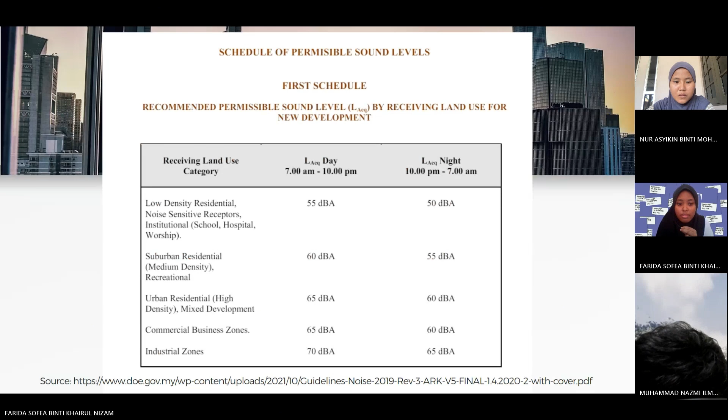We will continue our presentation with causes and effects of noise pollution.

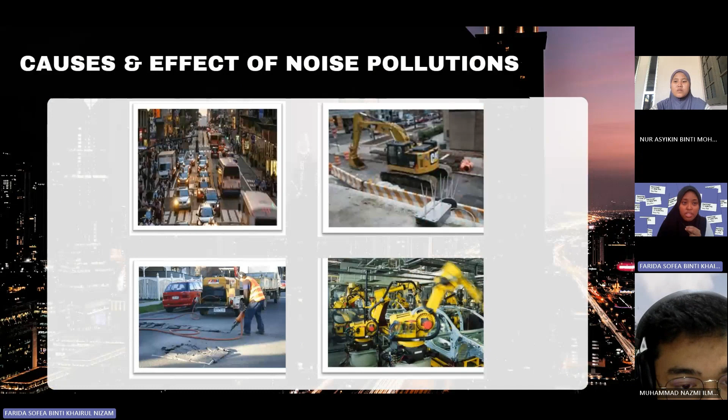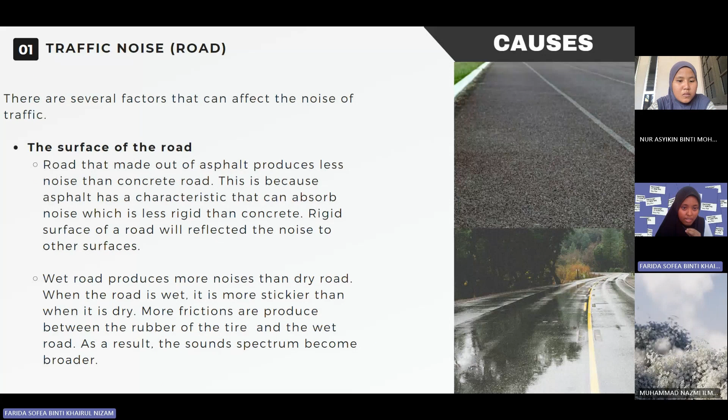The first cause of noise pollution is traffic noise on the road. There are several factors that can affect traffic noise. The first is the surface of the road. Roads made of asphalt produce less noise than concrete roads. This is because asphalt has a characteristic that allows it to absorb noise, as it is less rigid than concrete. A rigid road surface will reflect the noise to other surfaces.

Wet roads produce more noise than dry roads. When the road is wet, it becomes stickier than when dry. More friction is produced between the rubber of the tire and the wet road, and as a result, the sound spectrum becomes broader.

Second is the speed of vehicles. The higher the speed of the vehicle, the more noise will be produced. Vehicles driving at higher speed cause the engines to produce more noise, especially with an old engine. Besides that, higher speed vehicles have more contact with the road surface, causing noise to increase.

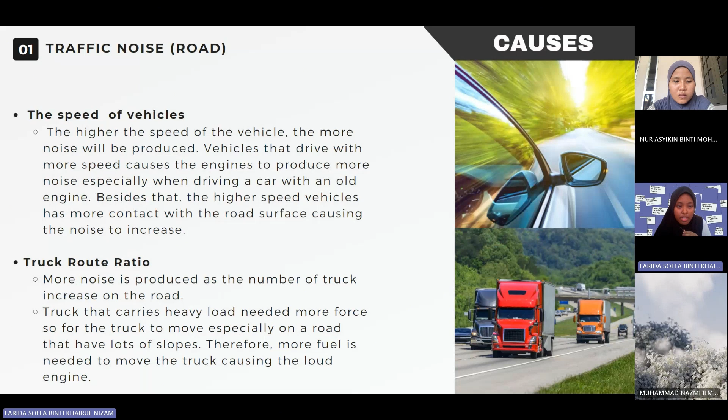Third, truck route ratio. More noise is produced as the number of trucks increases on the road. Trucks carrying heavy loads need more force to move, especially on roads with lots of slopes. Therefore, more fuel is needed to move the truck, causing a louder engine.

Next, the slope and intersection of a road. When the degree of the slope increases, more noise is produced. More force is needed to move a vehicle, which means more fuel is needed. This causes the engine to produce loud noise, which disturbs the ears.

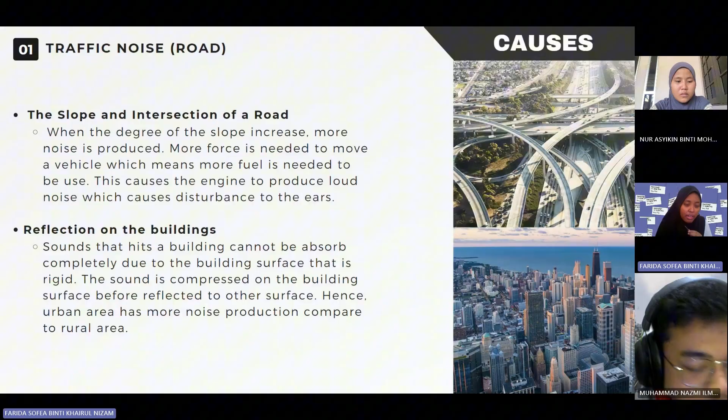Reflection on the buildings: sounds that hit a building cannot be absorbed completely due to the rigid building surface. The sound is compressed on the building before being reflected to other surfaces. Hence, urban areas have more noise production compared to rural areas.

The next cause of noise pollution is industrial noise. One source is aerodynamic noise from air movements. This noise can come from fan noises or turbines that cause airflow between them, producing whirring sounds. More air movement means more noise will be produced, which causes annoyance to workers in the factory.

Impact: activities such as hammering or objects falling from high places will cause loud noises to be produced. The higher the momentum, the higher the production of noise.

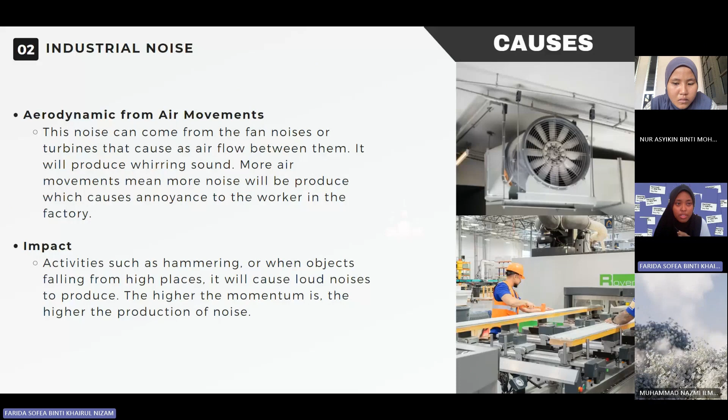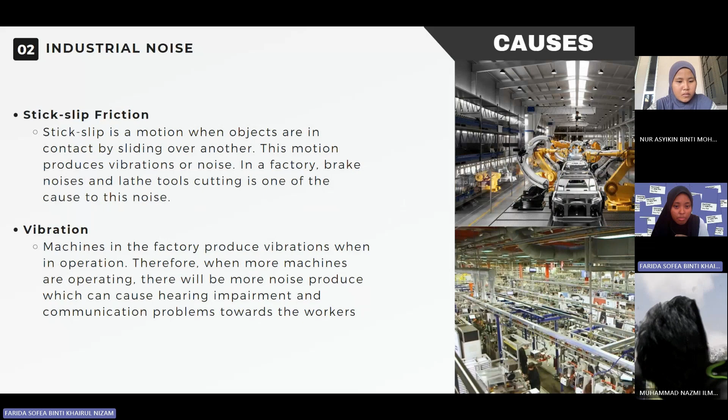And the last one is vibration. Machines in the factory produce vibrations when in operation. Therefore, when more machines are operating, there will be more noise produced, which can cause hearing impairment and communication problems towards the workers.

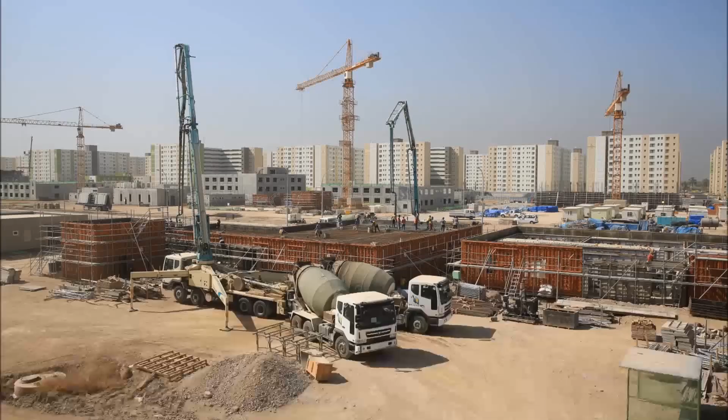Another cause of noise pollution is construction works. The first one is heavy machinery and equipment. Heavy machinery such as cranes, excavators, trucks, and many more creates noise through its engines. The noise also comes from the undergoing construction activities such as digging, piling, and mixing cement.

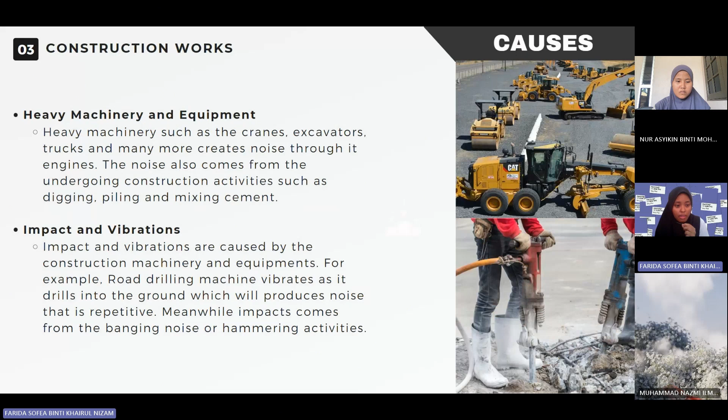Second one is impact and vibrations. Impact and vibrations are caused by the construction machinery and equipment. For example, road drilling machines vibrate as they drill into the ground, producing repetitive noise. Meanwhile, impacts come from banging noise or hammering activities.

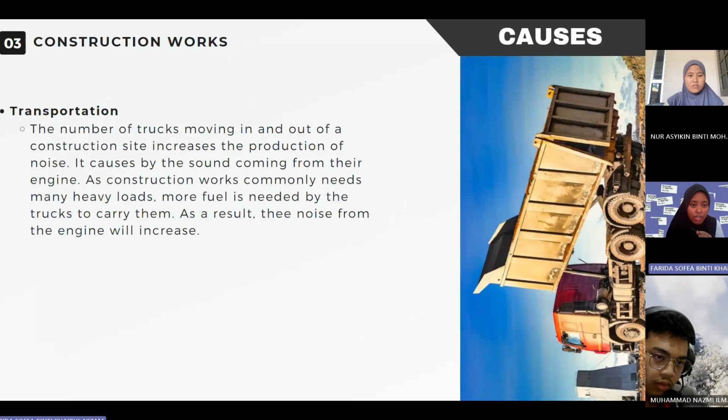And the last one is transportation. The number of trucks moving in and out of a construction site increases the production of noise. It's caused by the sound coming from the engine. As construction works commonly need many heavy loads, more fuel is needed by trucks to carry them. As a result, this noise from the engine will increase.

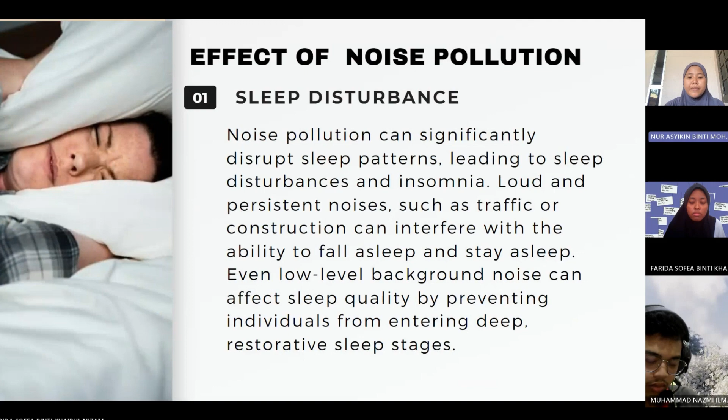I will explain the effects of noise pollution. First effect is sleep disturbance. Noise pollution can significantly disrupt sleep patterns, leading to sleep disturbance and insomnia. Loud and persistent noises such as traffic or construction can interfere with the ability to fall asleep and stay asleep. Even low-level background noise can affect sleep quality by preventing individuals from entering deep restorative sleep stages.

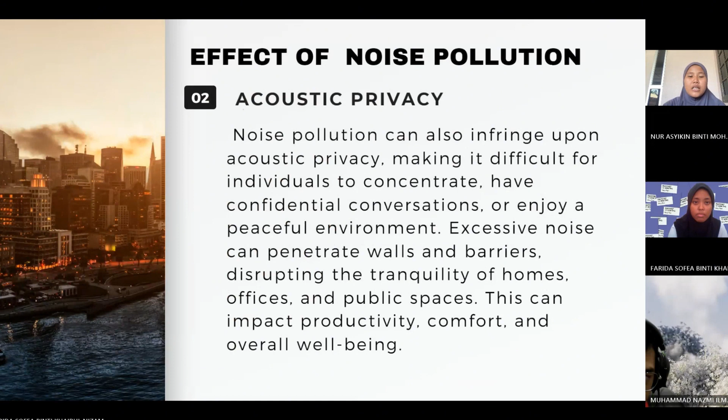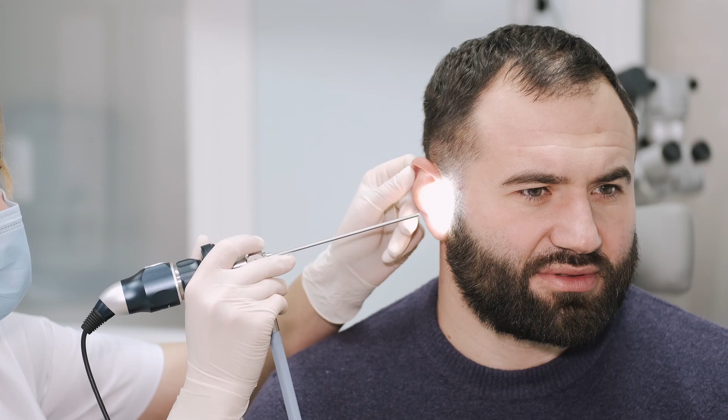The third effect of noise pollution is hearing impairment. Excessive noise pollution can indeed lead to hearing impairment over time. Prolonged exposure to loud noises can damage the sensitive structures in the inner ear, causing hearing loss or other auditory issues. It's essential to protect your ears from loud sound whenever possible to prevent long-term damage.

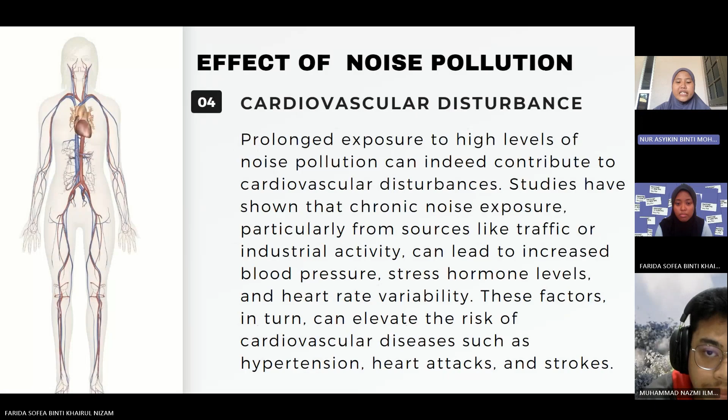The last effect of noise pollution is cardiovascular disturbance. Prolonged exposure to high levels of noise pollution indeed contributes to cardiovascular disturbance. Studies have shown that chronic noise exposure, particularly from sources like traffic or industrial activity, can lead to increased blood pressure, stress hormone levels, and heart rate variability. These factors, in turn, can elevate the risk of cardiovascular disease such as hypertension, heart attacks, and strokes.

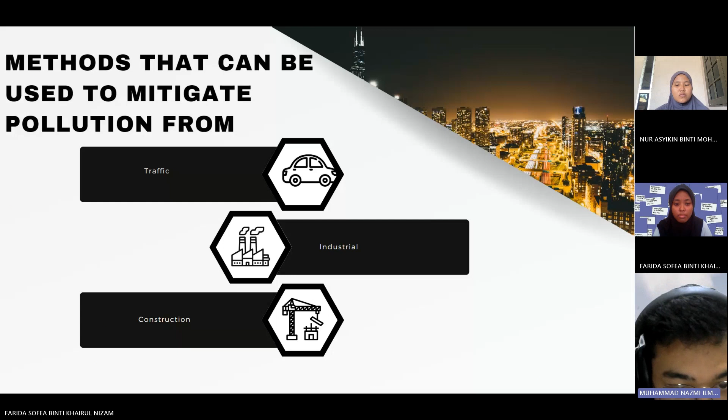So I will be explaining how to mitigate the problems caused by those three, which are traffic noise, industrial noise, and construction noise. So first, we are going for traffic noise.

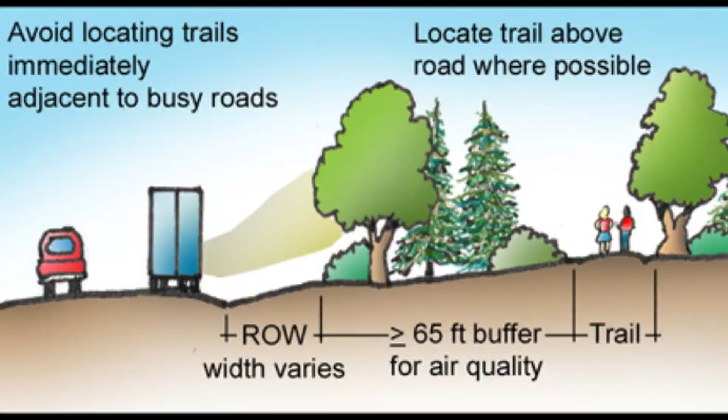There are many methods that we can use to influence the noise generation. The first one is to build the highway far away from any residential area. This can be done by setting a buffer zone, a set limit distance, so that the noise generated won't reach any residential area.

Next is carpooling, meaning fewer cars on the road. Carpooling means less noise generation overall, and using alternative transport such as, if you are commuting in a city, instead of using a car, you can use a bicycle or other alternative methods of transport, or you can also use an EV, electric vehicle. They don't generate noise as they use an electric motor instead of an engine.

Next is use of public transport. This is also almost the same as carpooling, reducing noise generation by not using your own car. Next is to adhere to the speed limit. The basic principle of an engine is the faster you go, the louder the engine will be generating noise. So when you adhere to the speed limit, the noise generation will be at a minimum.

And next, any modification done to the car or transportation that will increase the noise generation should be avoided to make sure there's no extra noise generated.

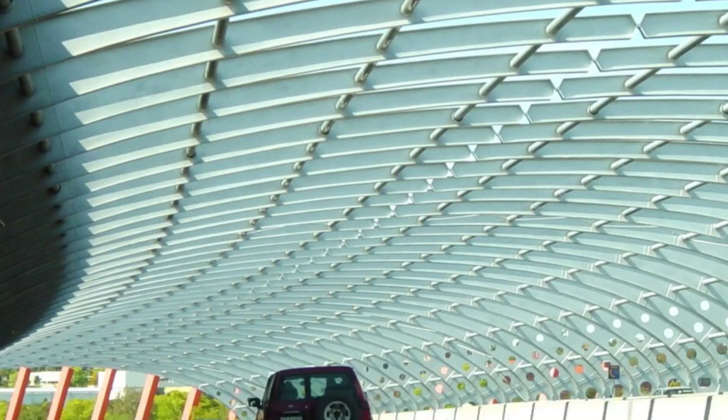And the other two are use of highway barrier as noise block and plant more trees. So use of highway barrier is to reflect the noise being generated. So let's say the highway is being constructed closer to any residential area, the use of barrier would minimize the leaking noise coming from the highway.

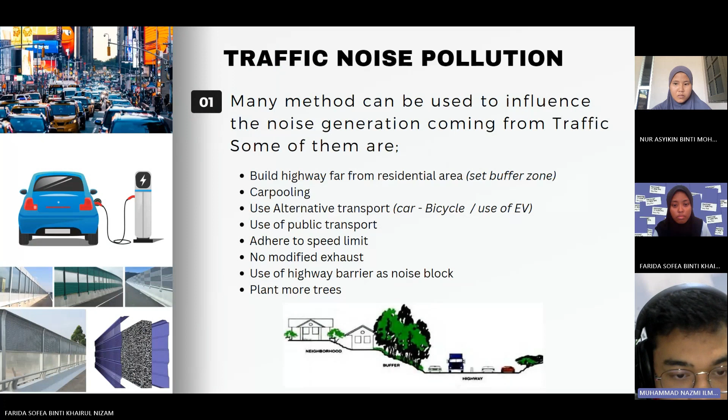And for plant more trees, as shown below, you can use the tree as a buffer. So most trees have absorbing characteristics, which means that if the noise being generated goes through the buffer zone, in this case a tree, most of it will be either reflected or absorbed. Right. So next is industrial noise.

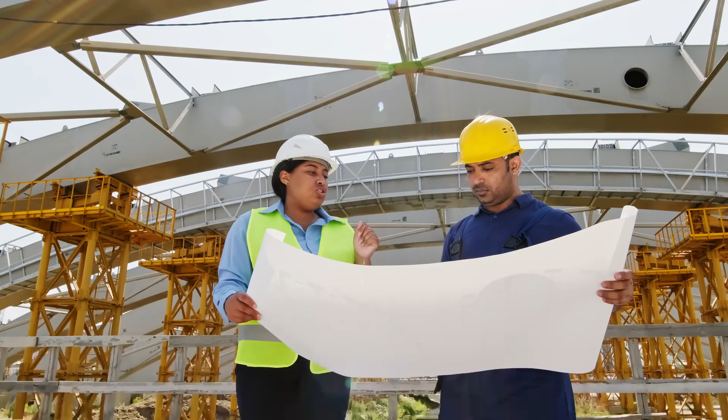Construction pollution, which is noise pollution as well. So first is planning and scheduling. Limit noisy activities to daytime hours when they are less likely to disturb residents. So we would like to make sure the noise being generated is done within the time where it does not disturb anyone's activities. For example, if you are doing any construction, make sure to do it in the daytime.

So schedule the loudest tasks at times when they will have the least impact. So usually this will be at lunch time, or from midday to evening. All right. And next is equipment and machinery. Use more modern and silent equipment.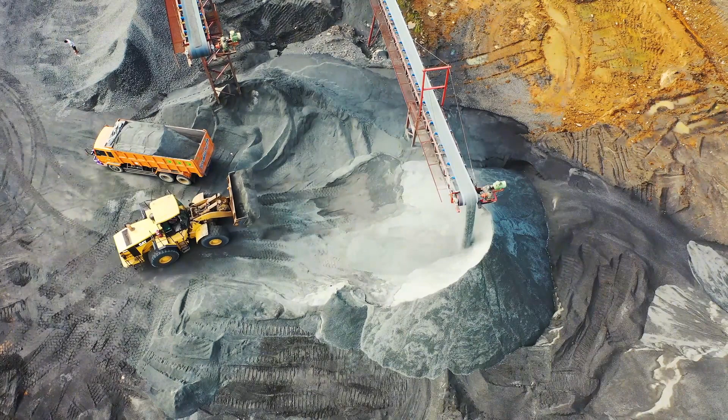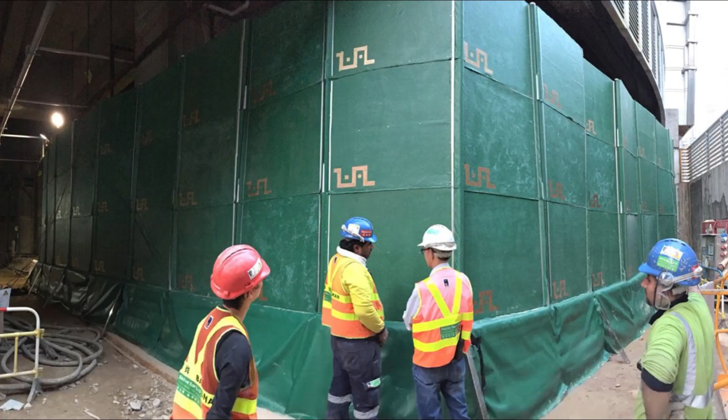So in this case, the older generation of equipment usually causes a lot more noise as they are old. So new and modern silent equipment, due to their technological advantage, will usually cause less noise compared to the old equipment. And you can also put a sound barrier around the perimeter of the construction site to reduce the noise leaking out of your construction site.

So next is construction techniques. You can use the prefabrication method. This is done by pre-assembling the construction material somewhere else. In this case, maybe you can pre-assemble in a factory. So when the time comes to construct it at the site, you only bring it for assembly. So it will reduce the time needed and thus reduce the noise being generated during the construction.

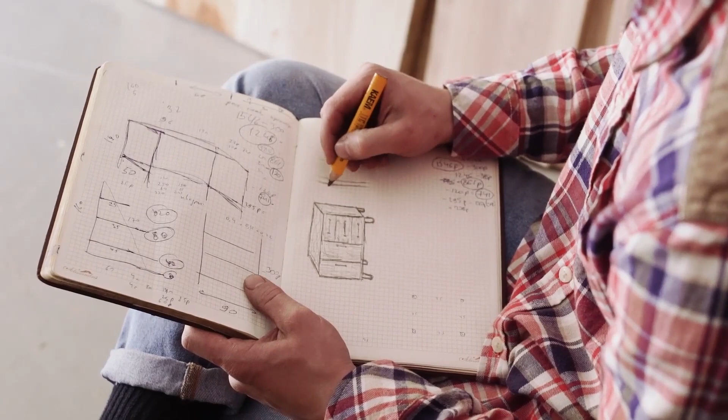So next is site layout and operation. So set a distance as far as possible from any noise sensitive area. So in this case, during construction, we would want to put any noise generating place as far away from any noise sensitive area. In this case, during loading, during crane handling, everything.

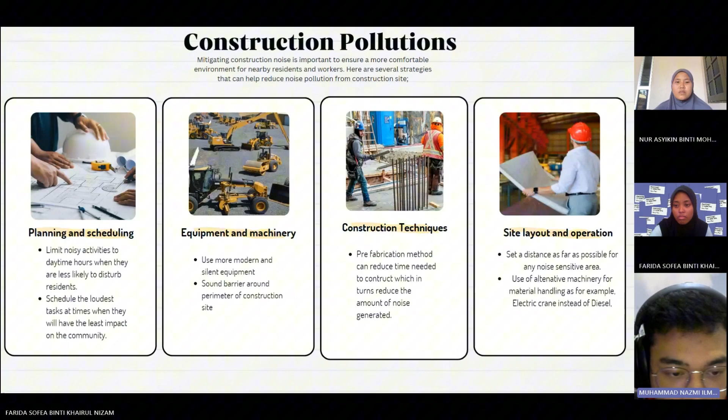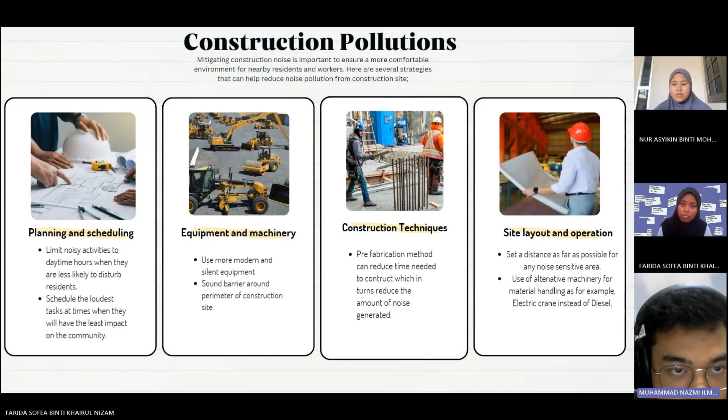So next is use of alternative machinery for material handling. So for example, if you use a diesel engine crane, you can change to an electric crane, which does not produce as much noise as a diesel one. So next is industrial noise mitigation.

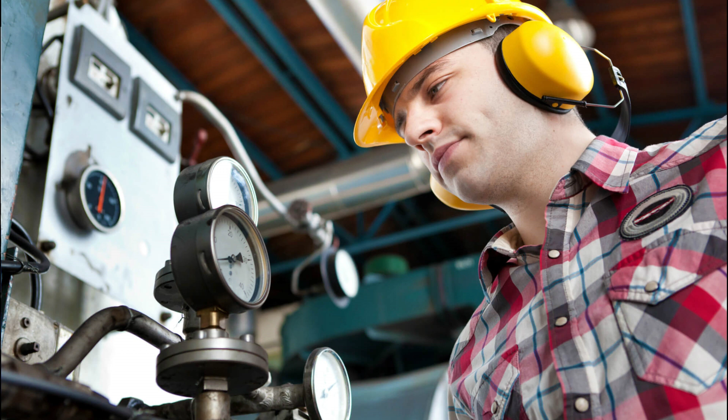So there are multiple methods we can use to mitigate noise pollution here. So first is personal protective equipment. So use of ear protective devices such as earmuffs, earplugs, and any ear protection can reduce the impact caused by exposure to loud noise. So in this case, as you know, industry causes a lot of loud noise. So it is good to have some ear protection, so that the impact would not be as bad as if you are not using any ear protection.

So next is for environment. This is the same as for the highway. So you can plant trees and shrubs around the industrial site to act as a natural sound barrier and reduce the noise pollution. Same concept as the highway one. And next is engineering control. In this case, we use a soundproof enclosure. So any noise being generated will be either reflected or absorbed by the soundproof enclosure.

So next is compliance. So in this case, there are two. First is noise regulation. So depending on the location, they would have to comply with the local, state, and federal noise regulations. This is to protect the residents nearby. So next is regular audit. This is to make sure that a company is not mishandling or misconducting anything that could worsen the noise pollution being generated in one place. Right.

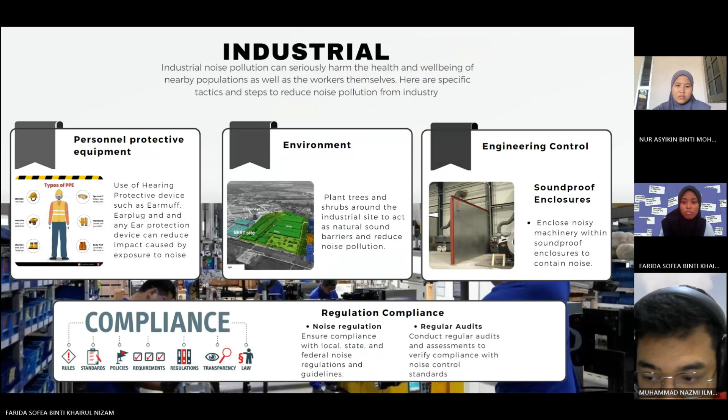So in conclusion, noise pollution poses a significant threat to both human health and the environment, as it can cause hearing impairment, annoyance, and sleep deprivation, which can affect the quality of life, and permanent or partial disability depending on the case scenario. It comes from many sources such as traffic, as we discussed earlier, construction, and industrial.

It's imperative to implement effective measures such as stricter regulation, better urban planning, and community awareness campaigns to mitigate its impact and ensure a healthier and more peaceful living environment for all.